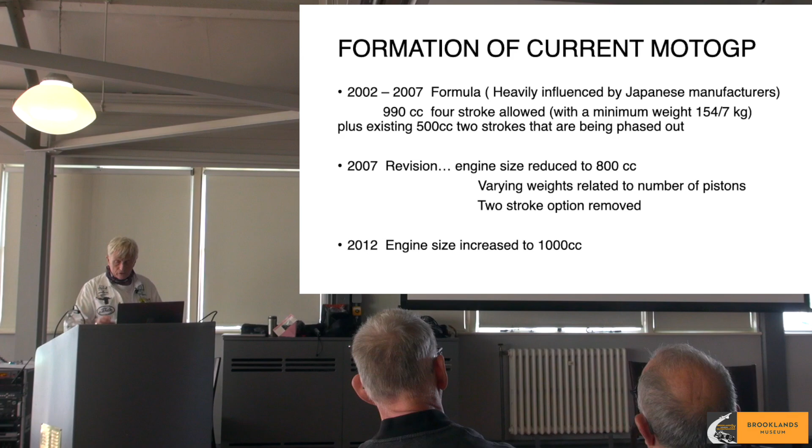So if we then move on to Ducati - again, this is my take on this. They had a small motorcycle group, and like the Italians, were really into their racing, small engines, small racing bikes, and some very creative designers and engineers. So the milestones to the MotoGP bike you see there on the left are from the 50s and 60s.

The four-stroke Desmo - that's the reason why I've got my bike there, which is 250. It's not a Desmo, but it's actually one year off the Desmo, so that's 1968. In those days, all the young lads around - and I was an old man by then - wanted something like that. Mine revs to 9,000 RPM, which in 1968 was about 2,000 RPM more than a Manx Norton. The problem they had in those days was a materials problem, which is often interesting - they used to get wire breakages in springs, because the industry was used to low-revving engines.

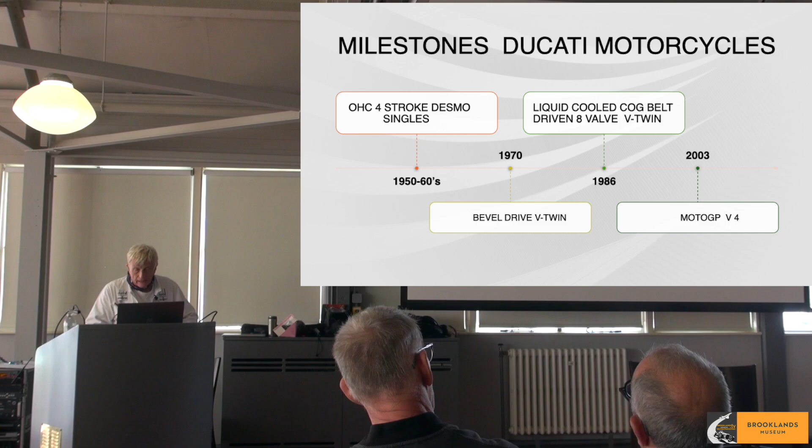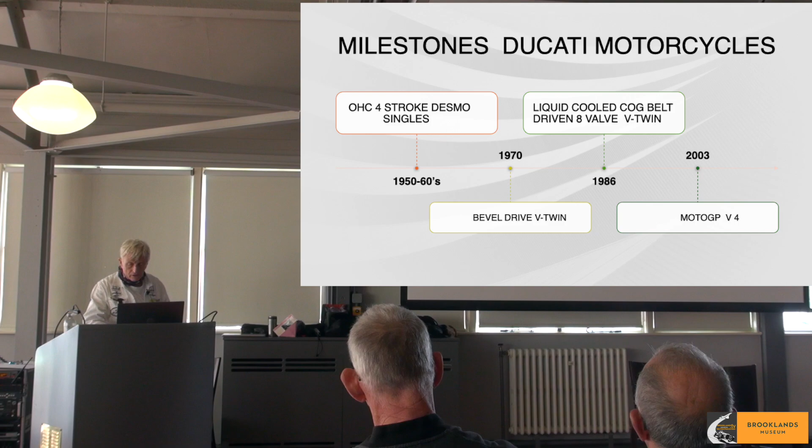Then in 1970, they took the bevel drive single-cylinder engine and made a twin. Then in 1986 they came up with the liquid-cooled, cog belt-driven, 8-valve V-twin, which was the start of their great success in World Superbikes. And then you come to 2003, and you've got the MotoGP bike down there. So we'll go on a bit more to that.

One of the interesting things here, and I think this is a difference to the UK - we as a country tended to have a much more practical application of design, whereas the Italians had an academic route to design. They took this guy from Mondial, Dr. Fabio Taglioni. He started his education before the war and finished it after the war, and his thesis was on direct springless valve operation - desmodromic valves, basically. He brought that from Mondial to Ducati.

He was seen as a very forward-thinking young guy, just the sort of guy you want in your design shop. So he was behind the bevel drive single, desmodromic valves to combat spring breakages, and he also did a lot of work on 2-valve hemispherical heads. If you look carefully on mine, you'll see in this photograph he did something that Norton did in the 30s, which was mixing vapor and air together.

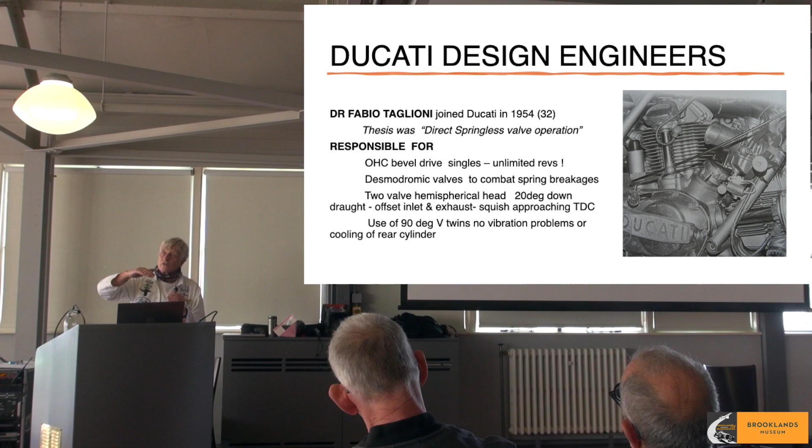One of the things Norton did, which he picked up, was offsetting the inlet valve - the inlet tract from the inline - and inclining it into the valve, and doing the same with the exhaust. So imagine a charge of this wonderful mixture of vaporized petrol and air that had got intimate and got together - you push it into the cylinder head, set fire to it in its flame path, and it comes round and goes out the exhaust. That's a very simplistic explanation, and that was one of his design features - not original, but he put that in.

One of the things with a really good design - mine isn't quite as good as this - you should put 2 plugs in because you can pick up the gas flow on either side of the piston, and then when the piston gets to the top, you get squish - in other words you squash the mixture and get a lot of power output. 30 brake horsepower out of a 250 back in that day was pretty revolutionary.

He also came up with a 90-degree V-twin. Why 90 degree? Well, 90 degree gets over a problem of vibration. Bear in mind people have got to ride these things, and one of the issues with a lot of British bikes is they tend to suffer a lot from vibration. If you're vibrating like that all the time, two things happen: the rider isn't particularly able to continue after a long race, and secondly things break - you wear them out. So the 90 degree, with primary balance, a 90-degree V-twin is vibrationless.

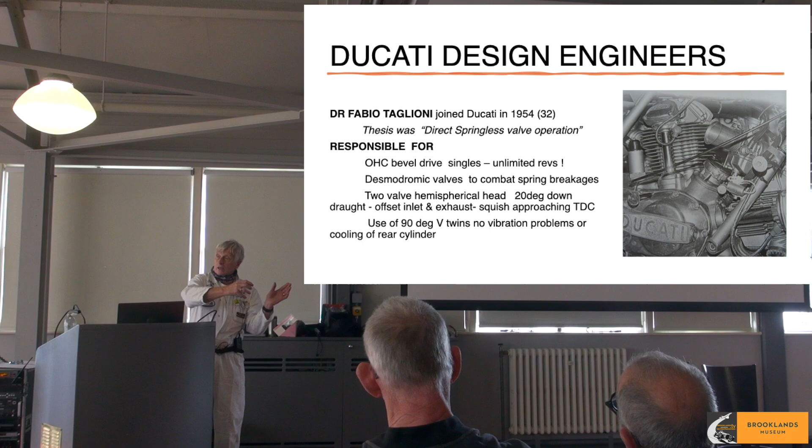A famous guy, Phil Irving, who designed the Vincents, reckoned that a Vincent engine was never a good racing bike. But the other benefit of a 90 degree V-twin, if you look at this photograph, you can lay one cylinder down and the second cylinder is in the airstream, so you get good cooling of the back cylinder. Whereas in a 45 or 60 degree V-twin, all the cooling comes into the first cylinder, air gets hot and warms the back cylinder up, you don't get the cooling. So when you get to real performance, that's another benefit of the V-twin.

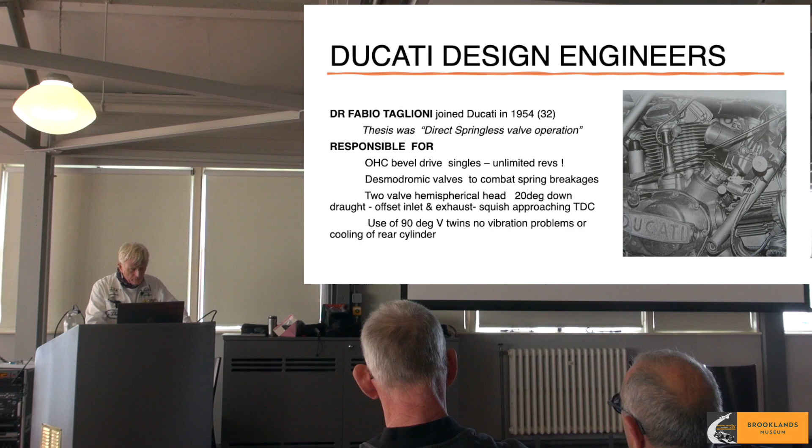Now, if we go on, the second man that played a big part in Ducati's story is Massimo Bordi. Taglioni took him on as a young lad from university, again with an academic background, and his thesis was on Desmo Quattro cylinder head design, in other words Desmodromic 4-valve cylinder head. What I talked about earlier was a hemispherical chamber where you put 2 valves in, and it's always been a problem of what angle you can get them at. However, going back to Rudge, somebody had the bright idea to put 4 valves in. And when you put 4 valves in, you can get a bigger area to get more of this wonderful mixture into the cylinder head. And you can also, and this is really important, put the plug, the firing point, in different places, because the middle bit where you really want it is not taken over by the valves. Does that make some sense?

Now, this engine, and I'll come on to the politics in a minute, this 8-valve V-twin engine was the basis of Ducati's success in World Superbikes. There's the numbers there - I didn't realize this until I saw them, those numbers are a bit out of date, but when you look at it, they had 14 titles and Honda only had 6. Honda is a huge organization compared with Ducati, because Ducati went from a small organization to get into this. And you'll notice with that V-twin as well, they took away the bevel drive.

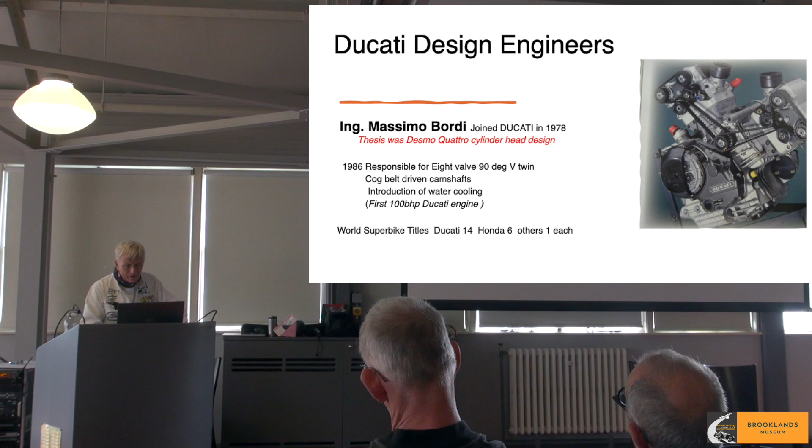So the management commissioned Bordi to produce a demonstration engine. It was all done outside, put together - he designed it, it was all put together. And the management sent Taglioni to Russia on a month's business trip, right? So you can imagine - when he came back, they'd set this test up. And this engine, sorry I'll go back, was the first mock-up to produce more than 100 bhp from a twin engine.

The other thing that Ducati had done over the years, still keeping the Desmo, and they kept the Desmo even though they could have gone to conventional valve springs, because of a marketing thing. If you talk to anybody - Desmo, Ducati. If you talk about V-twins, 90-degree V-twins - Ducati. A lot of people don't know why it's so good, but that's what they kept, because they introduced it to try and get into the American market, because obviously you've got these bloody great things called Harley Davidsons and Indians and whatever, V-twins, but not very efficient ones.

So they got into that as a thing. Now, they've got all this experience of some racing, because they did produce some racing bikes, etc., but they were all street bikes in inverted commas - it was World Superbikes, etc. And so you've got this new formula in 2003.

They had all this experience available to try and build a bike, because MotoGP bikes are specifically designed for racing. They're not sold to the public. They are designed for racing. So they decided that they would make all the power they could engineer out of a V-twin with desmodromic valves and figure out how to make it rideable.

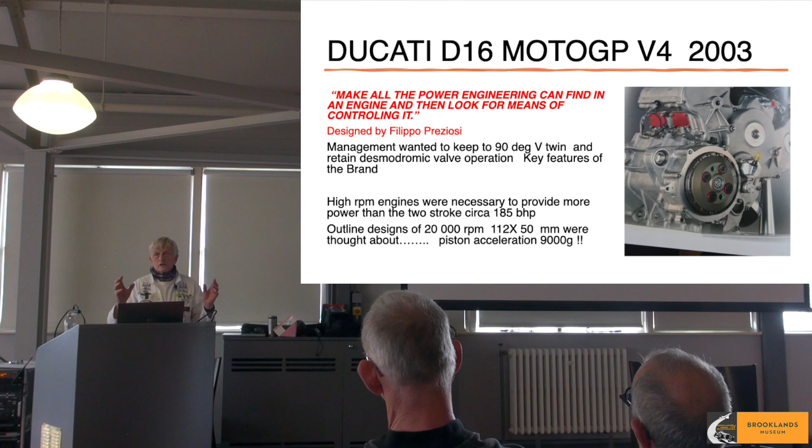They had, I understand, something like a spreadsheet: if you do this, then that's the result, so you can have this and that. And even at this date, they were still a relatively small company, beginning to get bigger. Now they're owned by Audi, they're top whack, and they've cleared off the Japanese out of MotoGP. But this is sort of a transition.

So they wanted to keep the 90-degree V-twin. They wanted to retain the desmodromic, and high-revving engines were necessary to combat the 185 bhp produced by the two-strokes, because if they weren't quicker than that, they'd give up and go home.

So for the outline design, they thought about keeping the V-twin, and I put the numbers up there. Can you imagine making a 112, so that's a 4-and-a-bit inch piston moving up and down 2 inches? Formula One does that ratio, not necessarily the size of the piston. They thought that was no good, that was just not going to happen. So they had to go to a V4 rather than a V-twin to get over that.

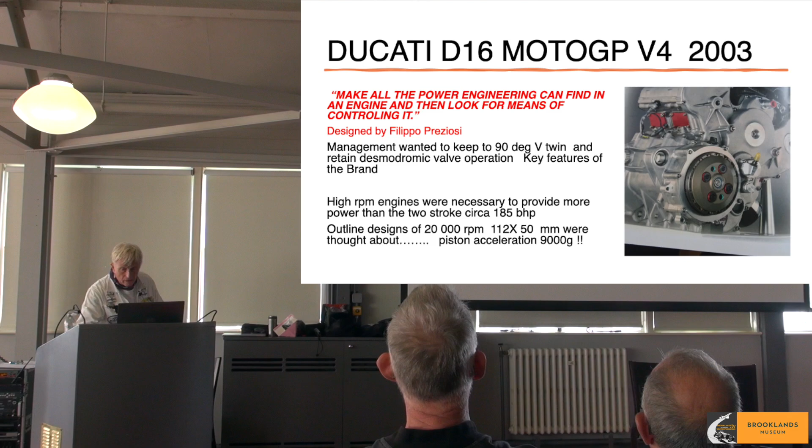If we come round here, 90 degree - now I don't know, Michael probably knows better than this, some of these numbers I've guessed from what I've read. They don't like people to know what they're doing and why they're doing it. So the 86 by 42.5 is what I guess the engine is.

Again, you run a factor of 2, with a ratio of 2 of bore to stroke. Mine is 74 by 54, I think, the 68 one. So again, quite over square. For those that don't know, over square means it's bigger that way than going up and down.

4 valves per cylinder, and the first year they came out with it running at 16,500 RPM, which I understand was about 1,000 RPM more than Honda were capable with their inline 4s. And this sent shockwaves to Japan, because this thing was a real powerful beast, really was, compared with what they had.

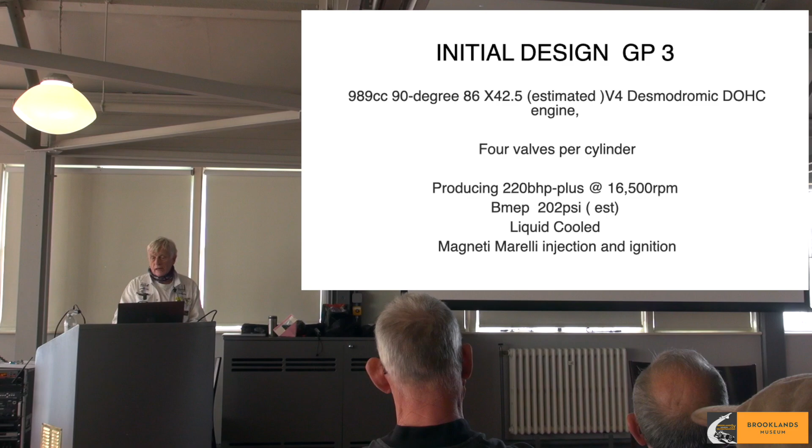The injection and ignition, I think, is back to Ferrari - there's a link there into Ferrari. Because these are early days, this is where you're just beginning to come into electronics and control systems and whatever. This thing was - how the hell some of them rode it, it really was.

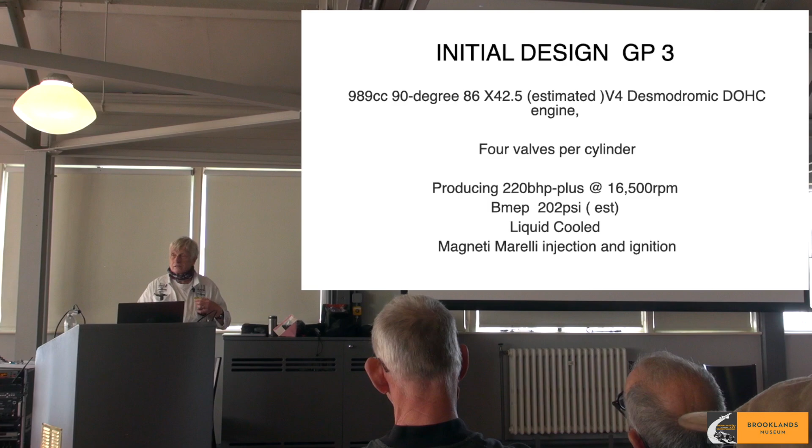Now, why did they keep that? Well, they were faced with a problem. Everybody else used hydraulic or pneumatic valve operation. They knew nothing about that as a company, apparently, but they knew everything about this, and it works. I don't know anybody - if there's any Ducati people, come tell me if it doesn't. It does work, and they've ironed out, or they thought they had, all the problems with it.

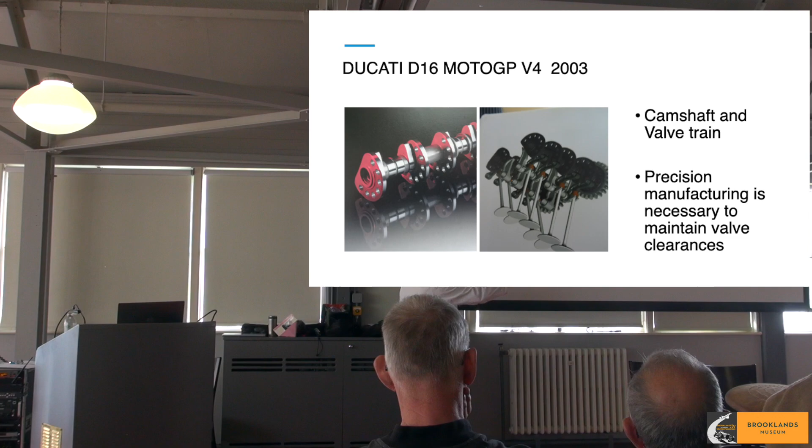So they said, right, we keep that, it's a marketing thing, and it works, so they don't have to spend time and money on that. And you get an idea there of what it's doing - I think it's wonderful, not a very great photograph, but imagine what that lot's doing at 20,000 or 16,500 RPM. It's just mind-boggling. You'll see some of the numbers later on.

The big problem they have - and again, they've solved this - is you've got to be very, very accurately machined, because all the valve clearances and everything are in that setup. You don't have shims and adjustments and everything. Maybe they have, but basically, they've got to be high-quality manufacturing.

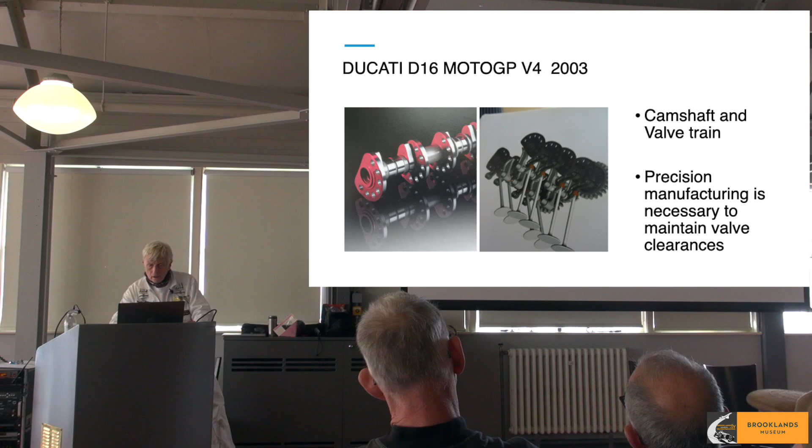Some of the features of the engine: they started off on high temperature cooling to try and get the size of the radiators down, because if you're going to push this thing through the air at 200 miles an hour, the smaller you can make it, the better. They also tried what they called the twin pulse and the 4-pulse.

In other words, they've got a 360-degree crank and a 180-degree crank. A 180-degree crank does that, the 360 does that, so you get a bang for everything together. I think Michael said to me the riders preferred the 180, because when you got the full bang, it was pretty big.

I also think that what they did, because they were getting breakages at the bottom end, was move one cylinder by about 60 or 70 degrees. So you've got your 90-degree, one cylinder, and you ended up in a situation where you got the first bang, and they delayed the second one by 60 degrees, so that you're smoothing out the power delivery, because this has to be ridden by somebody. This is the real challenge.

So that's one thing - the titanium conrods, very expensive, and a ratio of 2.3 to 1. In other words, you've got a ratio of the length of the conrod to the stroke, so that gives you some idea what you're up against. The pistons, which again Michael's seen these, British company, a bit of success here - Omega worked with them, and I don't know whether it's on here.

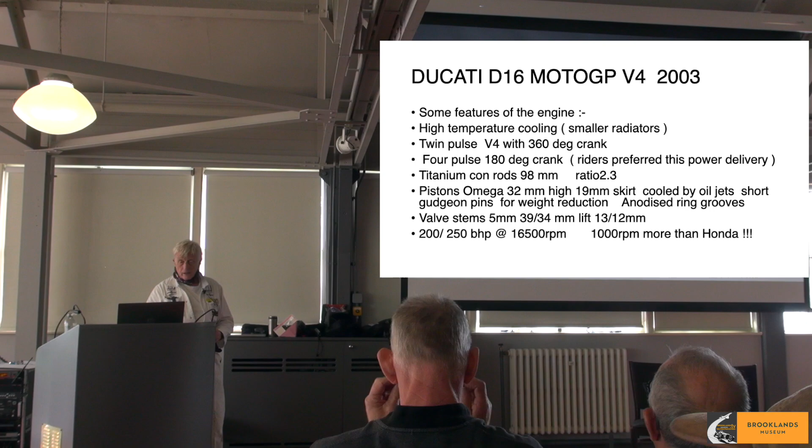So you end up with, I put 200, 250 bhp. I think, to be perfectly honest, they're academic numbers. You get the numbers that they want.

The other thing which is interesting to me, and I think a lot of other people, is that everybody who rides a bike rides it differently. One thing you may not know is that everybody has got a different gait. If I walk across here, this is a unique gait. Every one of you has got a unique gait. It's a bit like a fingerprint. If you ride a motorbike, you will ride a motorbike differently.

When you look at the present, yesterday at the sprint race at the Sachsenring, the first four people were in less than a second after 15 laps, and they were mostly on Ducatis. Equally, the thing you see now in modern GP is they've got plenty of power. The problem is trying to maximize the power over a race so the guy can ride it to the limit. You hear a lot about late brakers, but other people can carry higher corner speed because in their physical makeup they're good at different pieces. These bikes are actually set up for the rider, and they've got the ability to do that.

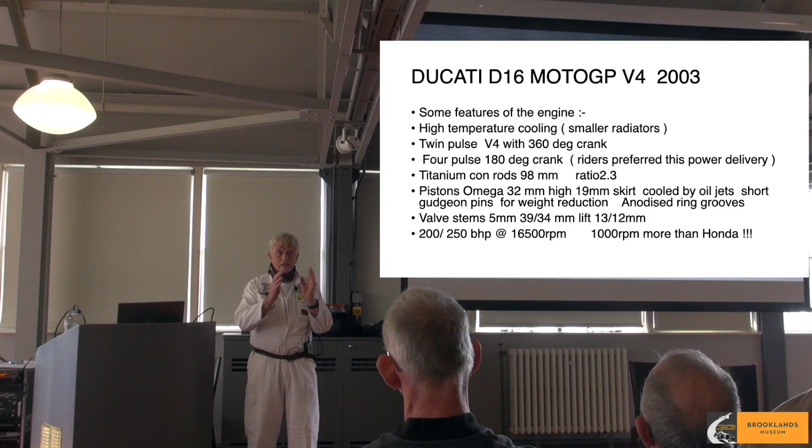So in simplistic terms, if it's going up a hill, it's shoving fuel in. If it's coming down a hill, or for a period where it's not at full stretch, or braking when it's shut off, they're cutting off the fuel so they can maximize the fuel and power output into the place where they want it.

With this bike, what it did for them the first time they went into MotoGP was one win and eight podium finishes. Harnessing the considerable power was a challenge - I think that's an understatement. Capirossi and Bayliss were second in the Constructors' Championship, and they did have reliability problems with it. I think that is an incredible achievement for a company that had never actually made a proper MotoGP bike to a new formula, and it scared the daylights out of them.

Now, they believed they were having a problem with wheel spin. So in 2004, they diagnosed that problem as the engine being in the wrong place, and they moved the engine back. Well, it didn't solve the wheel spin problem, but it made the bike totally unrideable because there was no weight on the front end - I'm exaggerating, but they took the weight off the front and nobody could really ride it. So they wasted a whole year and finally realized the problem wasn't where the engine was, it was the delivery of the power that was the big issue.